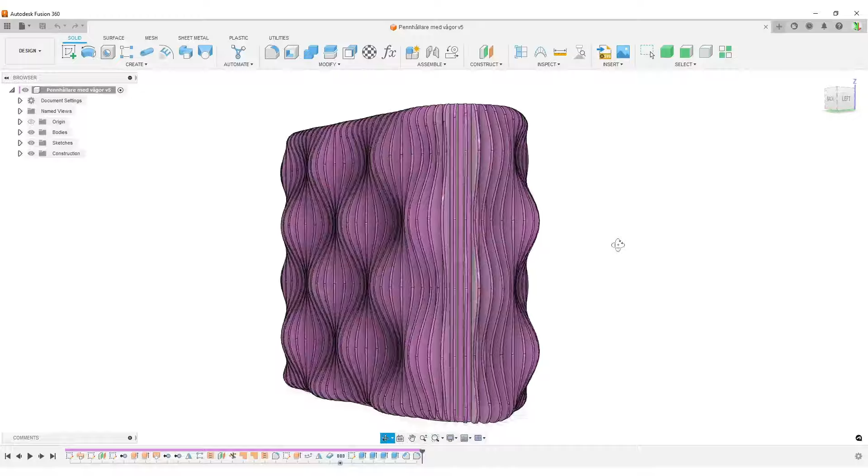I've been away for a while doing other stuff, but now I'm back to doing more strange design. In this case, like you can see, the waves going in and out of this. In this case, a pen holder. It can be done for other stuff.

Let's have a look. I have already uploaded some to Printables. This is basically the design we're going to make. I will not make this internal divider in this, which I've not designed, and there's a triangular version.

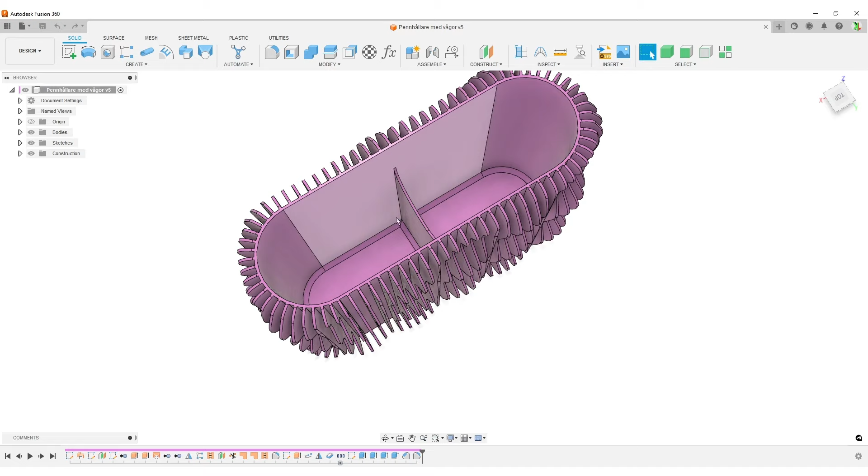Some more things to say. I will not make this. There's a chamfer and an internal support or divider here, which I will not make. I will make the outer body now. You need to add this yourself in any way you want to.

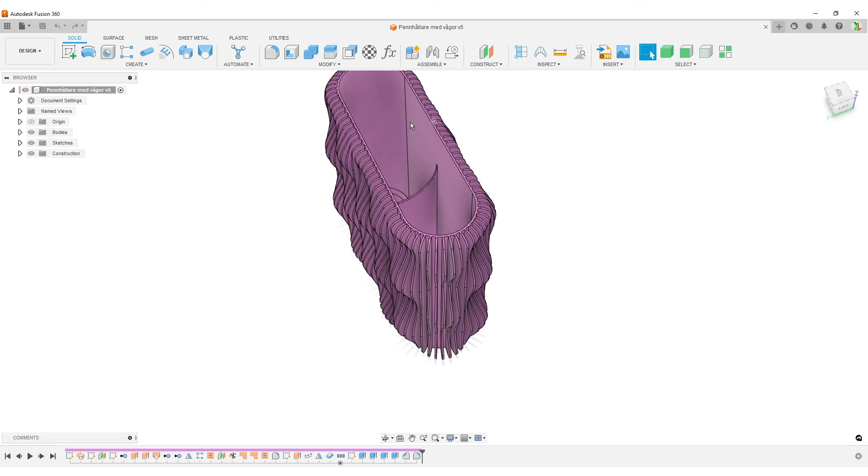I did this one for two reasons. If I put a pen down here, it will slide down and basically disappear. And the other thing, it makes the model more rigid. If I don't have this, these two outer sides here can be squished or stretched outwards because it is flexible, even though it's PLA. And yeah, that's it.

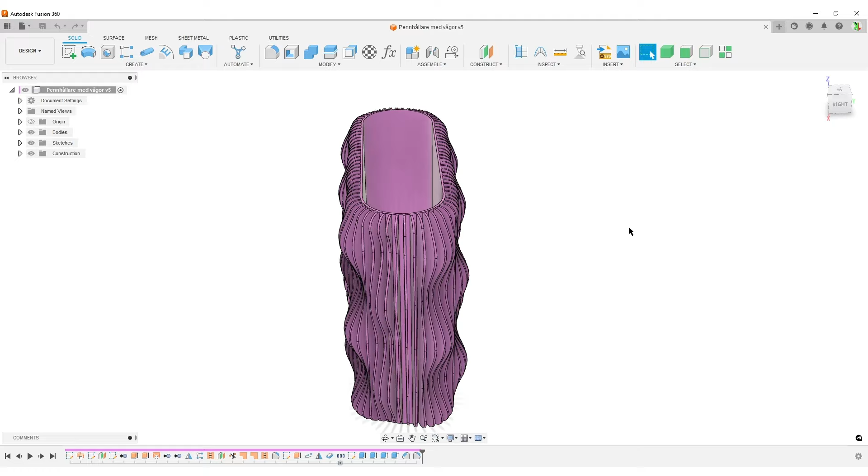Let's talk a bit more about this design intent. If you look at the model, you can see on the top here the slot shapes, and the waves are like conformed to the slot. So this is cut in a portion of the waves where they are basically at the same position. But at the bottom, I have like the maximum wave, to make this interesting geometry towards the table it's

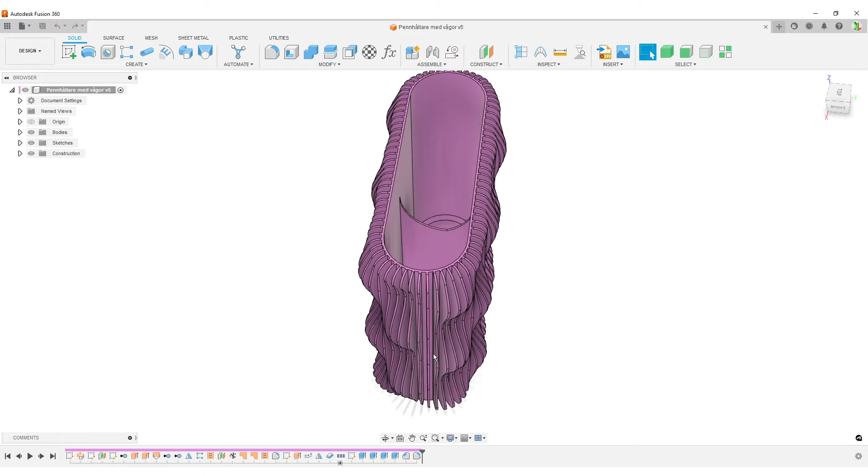standing on. Another thing, the waves, you can see that they are not like perfectly placed. They are slightly off. You can see the peak here is not exactly at the side here. If you want to do that, we can do that. We're going to work through the workflow and have a look at the sketches.

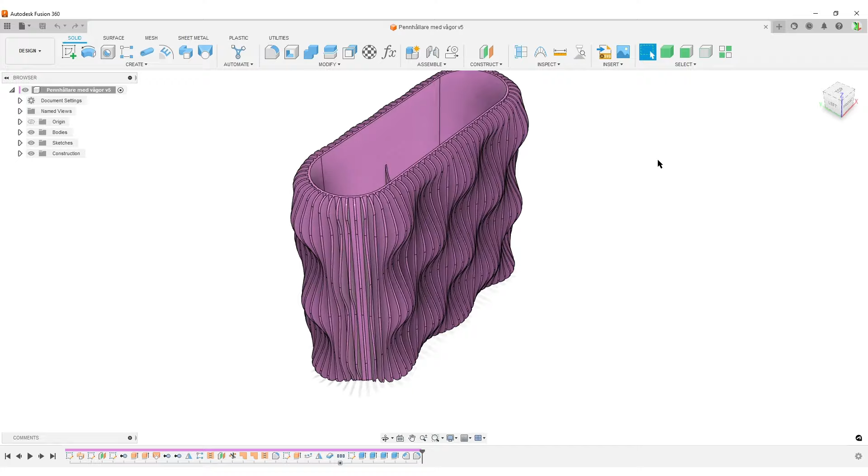And this is from a Reddit question, and in that case, there's a picture. And in that picture, there are waves on the round edges here on the ends of the slots. They are like revolved. There's waves, and then they revolve the way around and keep doing a wave. Yeah, that's a possible way to do it. If you want to do that, you need to do some more work on this workflow.

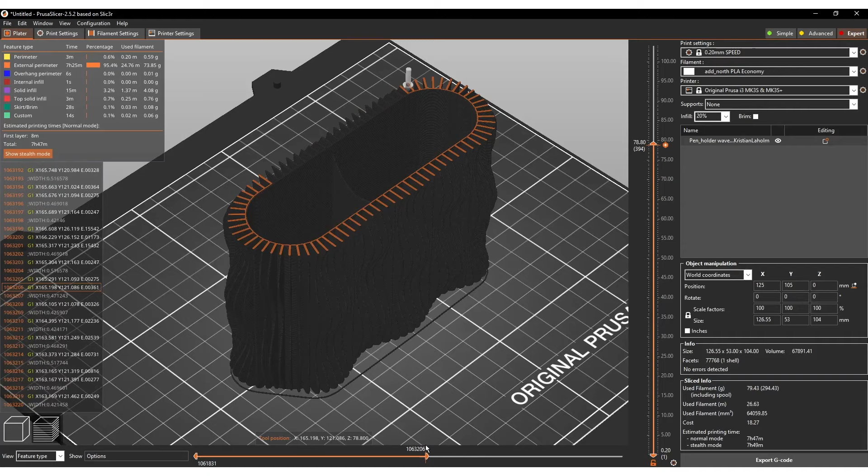If you have a bigger nozzle, it might be possible to print in vase mode, but I have a 0.4 millimeter, and 0.4 is too thin to be stable. So I'm running with 0.8. That gives enough stability and rigidity for my taste.

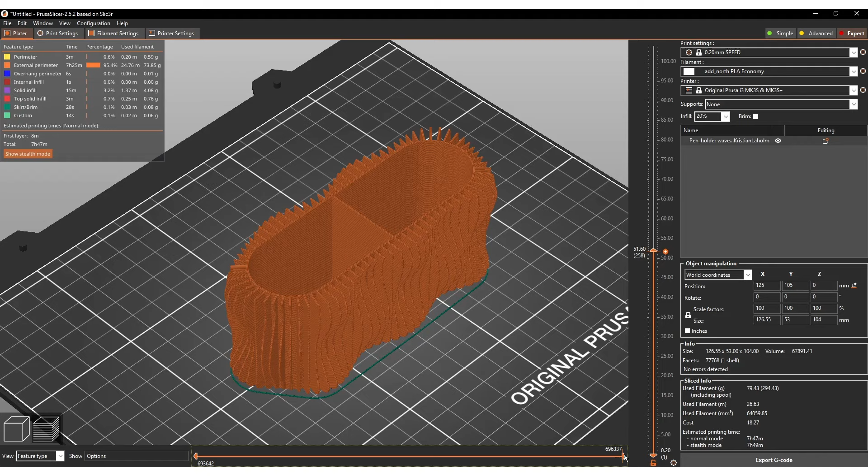So it does the outside first, and then it does the inside in this case. And of course, down to the support I made a bit further down, it needs to do two runs on the inside for the two sides, and then it does this. So still reasonably speedy printing because the nozzle doesn't run around chasing infills and stuff. Just does that. Let's move that out of the way.

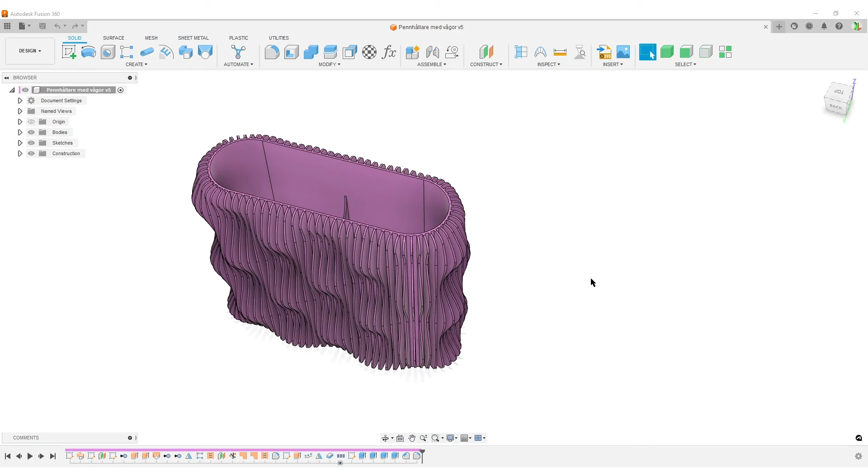For the rest of us who want to make the model, let's get going. We're going to start a new design. I was going to keep this here for reference if you want to have a look at it. We are here in a new design. I will not save it, but I normally recommend starting by saving your design.

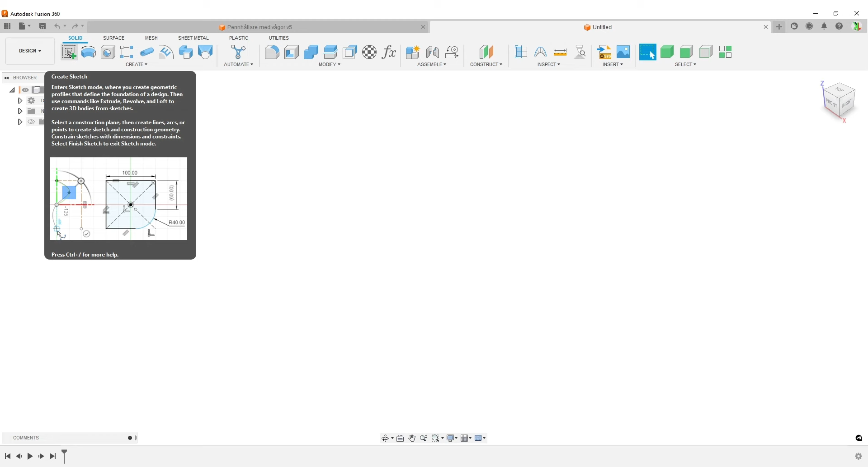Create a component if you want to compartmentalize things, or use this in other things, or derive it into something else. But I'm just going to make the design. This can be driven by parameter, but it's not really a parametric model. I will do some calculation as I work through the model. I hope you can follow along and understand how I think. But yeah, let's get going. Some of these things just need to be created.

Create a sketch. We're going to do it from the top, like that. Of course, we're going to start with a slot. Everything is basically a slot. I'm making the slot slightly off from origin point, so I can add constraints later. I'm going to do a midpoint for this construction line to the origin point, so things just lock down. D for dimension, let's start some dimensions. I want to do tangent because I want to select the outer edges of these two arcs.

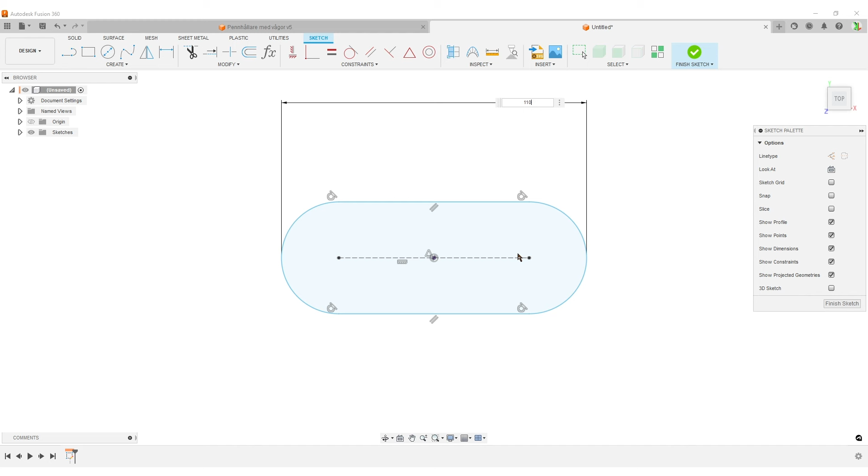110 maybe, this is going to be the path for a surface sweep. And the width of it, let's make it 38 millimeters, something like that. And we could do a line. This is going to be a profile for the sweep. Make it a bit slightly off from it. Make it vertical, it's going to end up being a perpendicular.

That's enough for me. I'm going to do a coincident constraint. In this case, I want to coincident the midpoint of this line to this line here, but not the midpoint. If you do midpoint, it's going to slam it to the center here, and that would make a totally symmetric model. I don't want that. So I'm going to do the coincident constraint, hold down shift, find the midpoint, and then select this line. That means I can take this line and move it in this direction, but the midpoint will stay where it is.

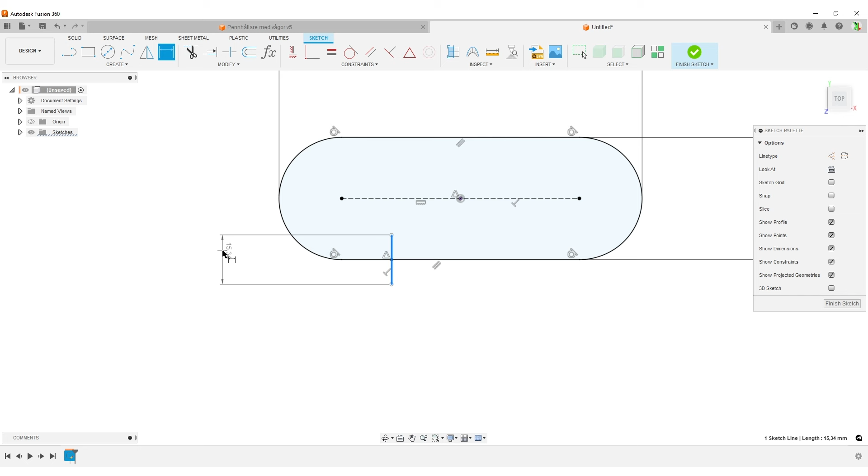D for dimension, this profile here. So this is going to be the distance between the peaks and valleys of a design, of a wave. So I'm going to do that 5 millimeters. This is a part where you can play around slightly. And then I will dimension this line here from the origin point. Let's just do 10 to start with. This I might play around with to decide how I want the waves distributed around the slots.

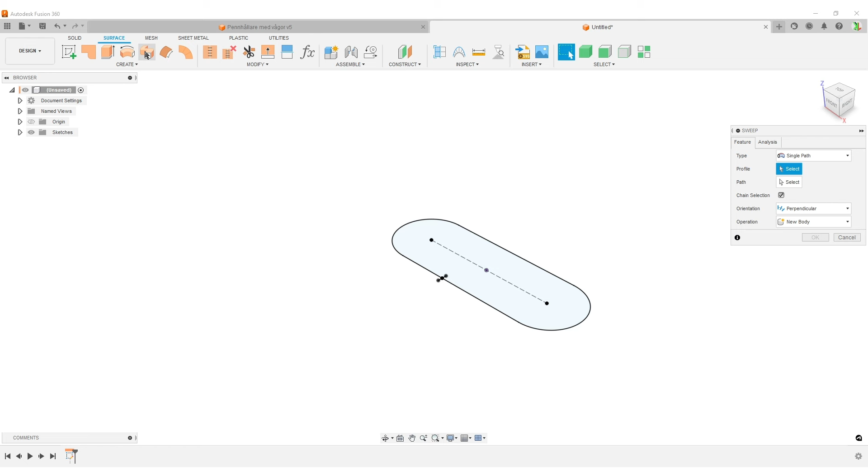So let's finish. We're going to move over to the surface tool and we're going to do a sweep. You can of course use the S key and search for commands. The profile is our short line and the path is the full slot around. And we're going to do some twisting, 360.

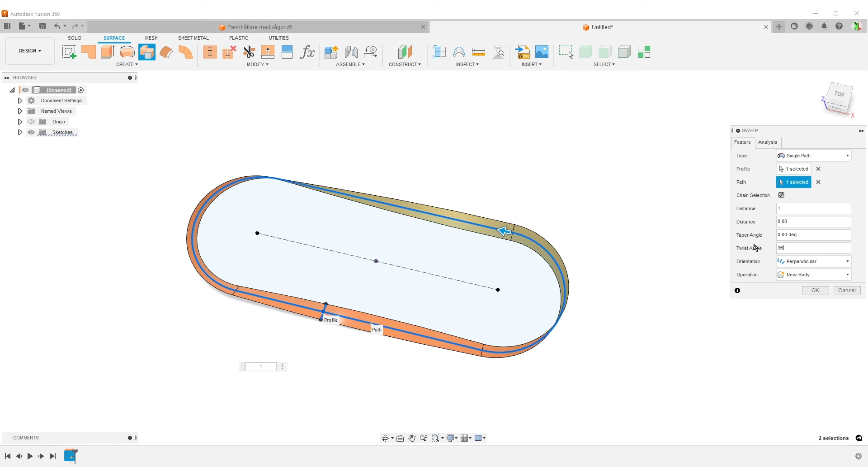Why are you moving around? Sorry, it should be a 1. Sometimes when I hit my number keyboard, it jumps around the menus. I don't know why, if my computer is doing some stupid stuff or something else, but distance should be 1, twist angle 360, multiply by the number of turns. Let's do 7 just to see if that looks nice.

Gonna hit OK, gonna look from the top and have a look at these, and you can see the problem here is I basically got one wave straight up on the side here. I don't want that, so I'm going to move that in a short while. But have a look, this is the amount of waves I want. Do I want more or less? So yeah, it's up to you.

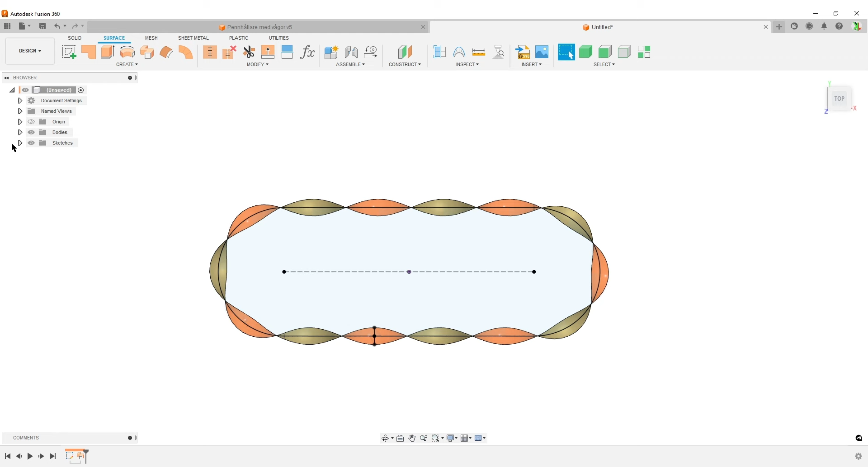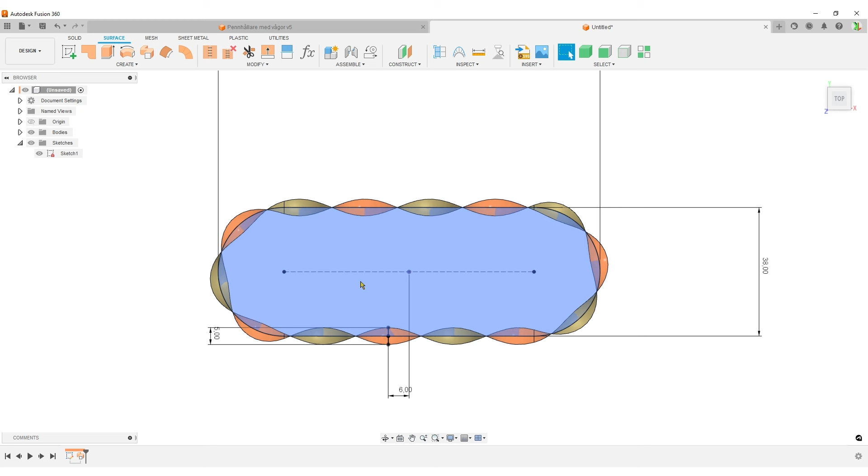Open up our sketches, right click, say show dimensions. So I don't like that this wave is basically on the mid of this arc here, so I'm going to edit this to like 7. Maybe move it to 6. That gives the feeling I like. You can see this wave, of course, there is a mirror symmetry because we are moving around. But you can see there's no wave directly on the mid of the side, and yeah, this is the way I want to do it. Up to you, play around the dimension.

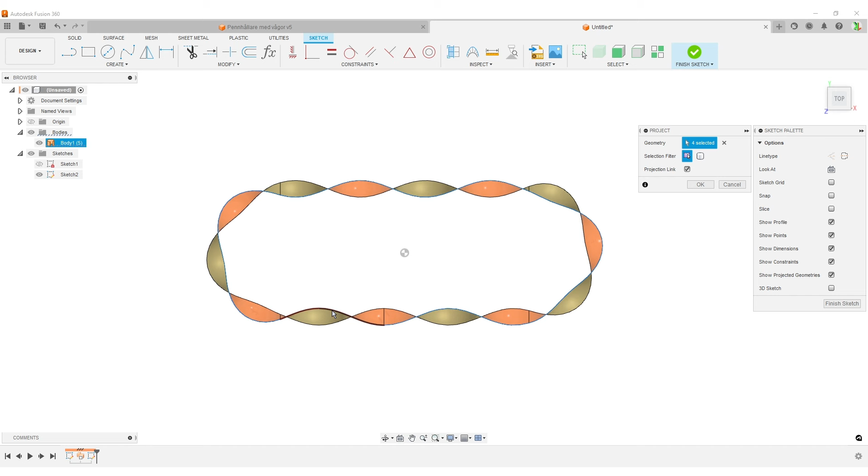Gonna hide that sketch, we're gonna create a new sketch. Once again, the same plane, hit P for project, and we can project in one of the edges of this. So we're going to make one of our first sine curves. This here, where are we? We are there, we are over here. If you get confused and have us select everything, open up the body of our browser and hide. Oh, we are missing one part, so we need that one for just checking things. Hide the body, we have a closed loop. Gonna hit OK, I'm going to finish sketch. That's number 1. Now I'm going to turn on the first sketch again.

You can name sketches, because I want to know the length of this slot shape here, also the perimeter. So I'm going to inspect, simply select the profile.

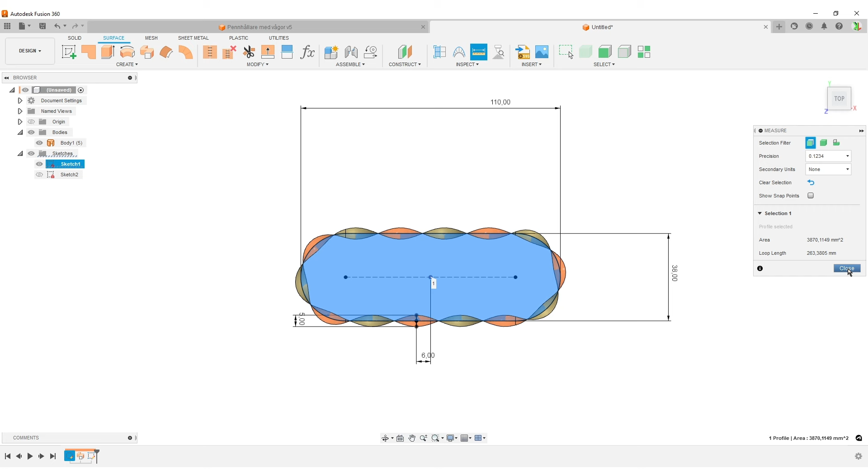I'm going to put the loop length, that is 263 millimeters. And we did 7 waves, so let's bring up our calculator. It was 263 divided by 7, and we get some strange 37.5. This is like one full wavelength. Why am I calculating this? Because I want the waves in both vertical and horizontal direction to feel almost the same. So I'm lazy, let's use 38.

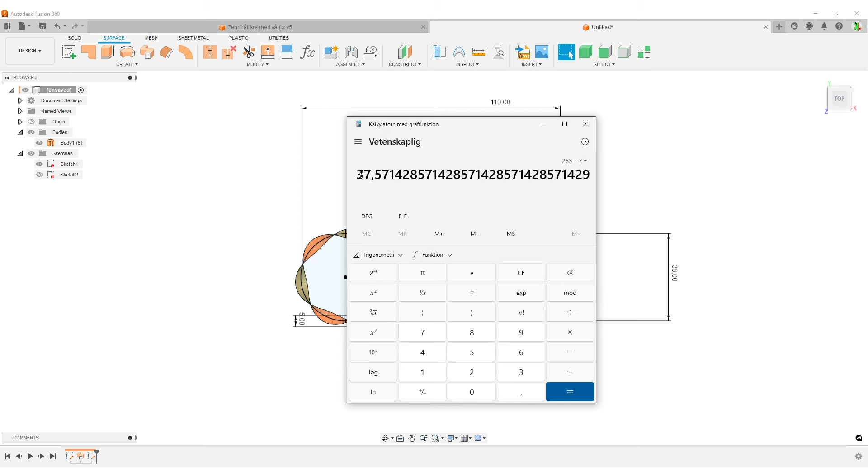Let's move this away, turn off this sketch. We need now to create - yes sir, we had our first wave here. Going to make a second one, so we can do that on an offset plane. As I said, I decided on 38, so 38 is a full wavelength, so I'm going to divide that by 2 because we're making the half wave.

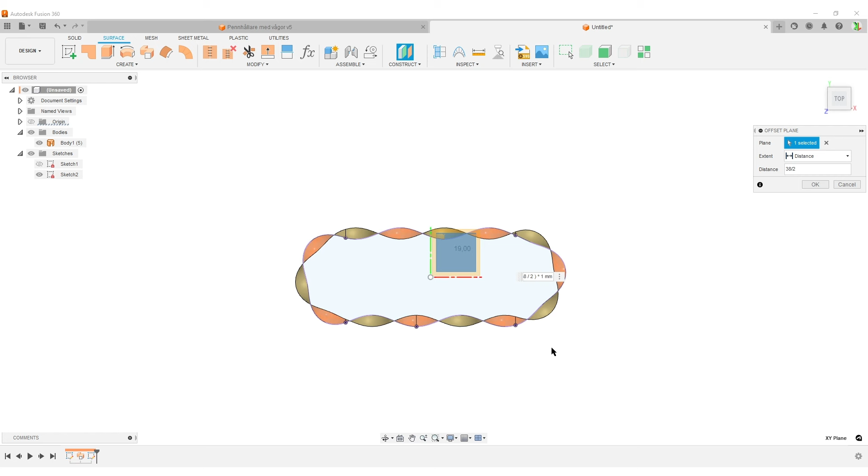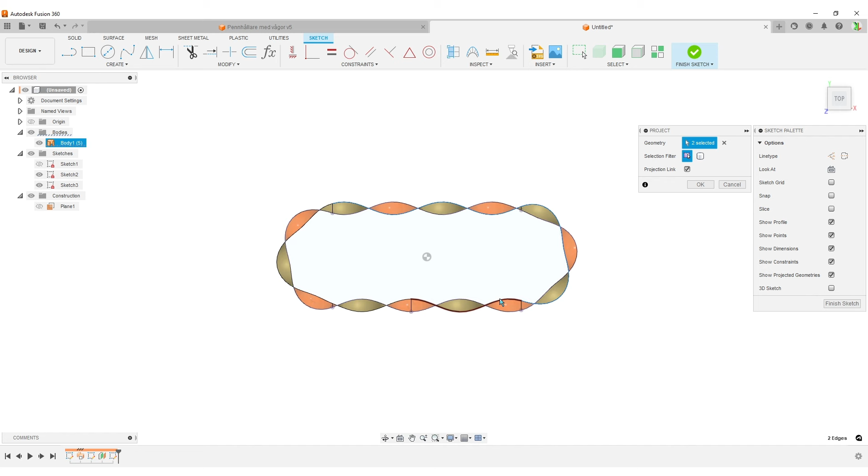Where do I want to go? You can see, okay, that's that size. I'm going to select the opposite here. That one, that one, let's see, and that, close the body to check. We have like two closed loops. Going to hit OK, finish sketch.

Turn things around slightly, have a look. Yeah, well, that's good, we have now used this body for what it's supposed to do. So just to clean up things, I'm going to right click and do a remove, because I will not use that body again, I don't want it in the way.

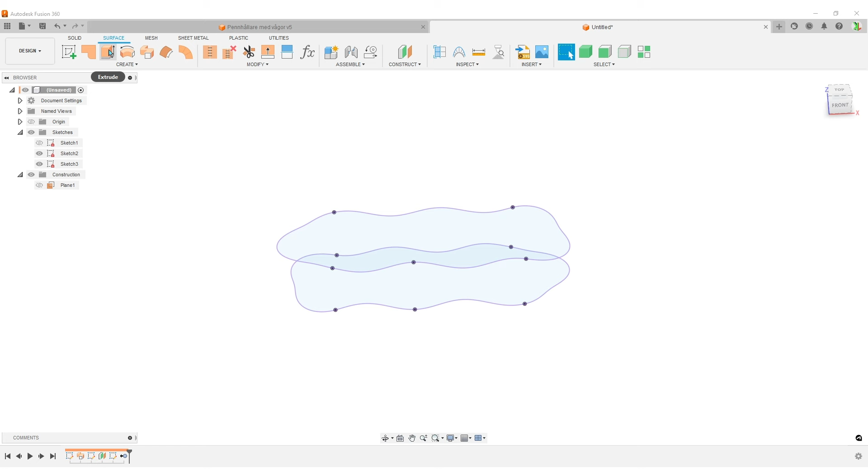Going to extrude, surface extrude, select the top here. This I'm going to do up 5 millimeters, extrude - this is supposed to go the other way. I'm doing this because I want to make a loft, and I want to make that tangent so it flows nicely together.

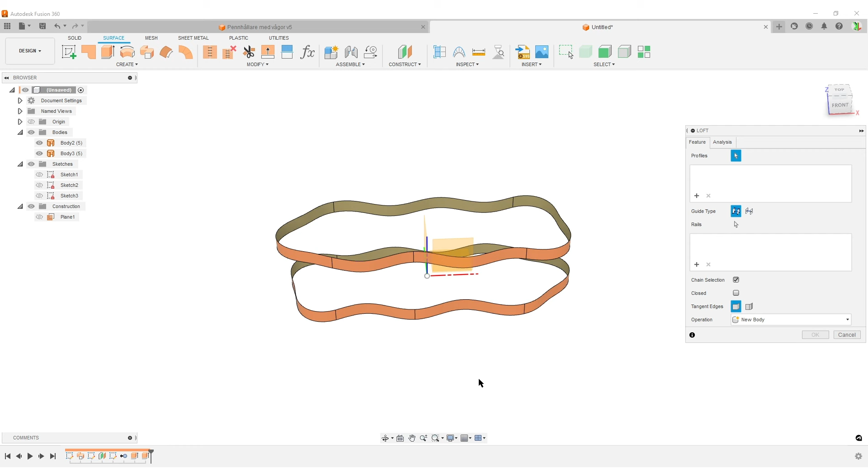Hide the sketches, so I know I'm selecting edges. Once again, here in the surface menu, I'm going to go for the loft. Make sure chain selection is selected - that means it will select the full loop directly, otherwise you have to click on the edges. Here and here, like that. And we're going to change these to tangent, and just simply hit OK.

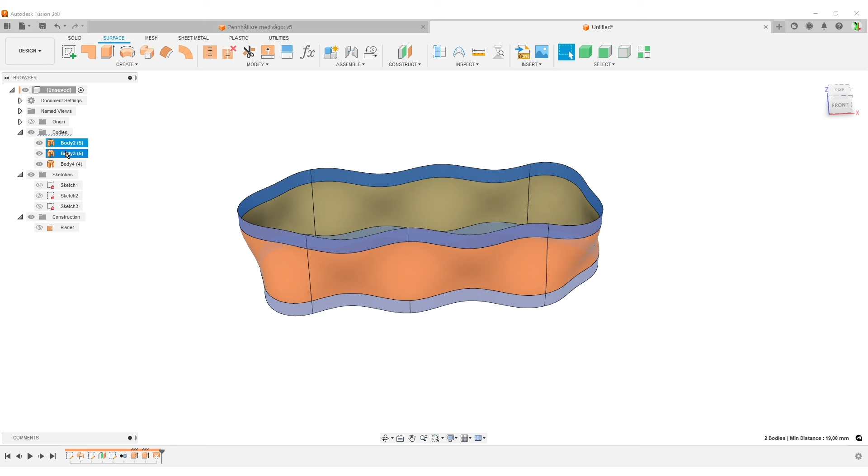We have now two tool bodies here, so I'm going to hold down Ctrl or Shift to select both of them, right click and do a remove. Turn on this plane just to see where we are.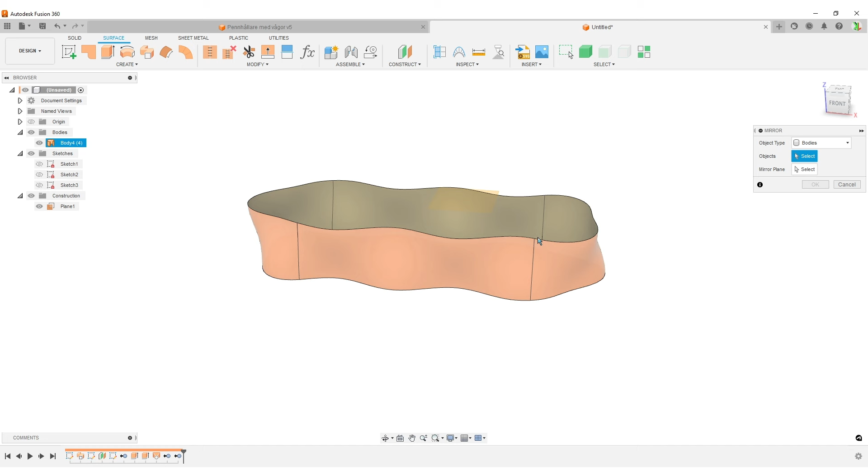Because this is like half of it - made half a wave, so going to do a mirror. You can find out by the modify, or simply hit S on the keyboard and start typing in mirror. I also have placed it up here, I could use that. Mirror of body, this body, what plane - our construction plane we made earlier, that's where we made the top sketch. Going to mirror, the operation is going to be join. Hit OK, going to hide the plane.

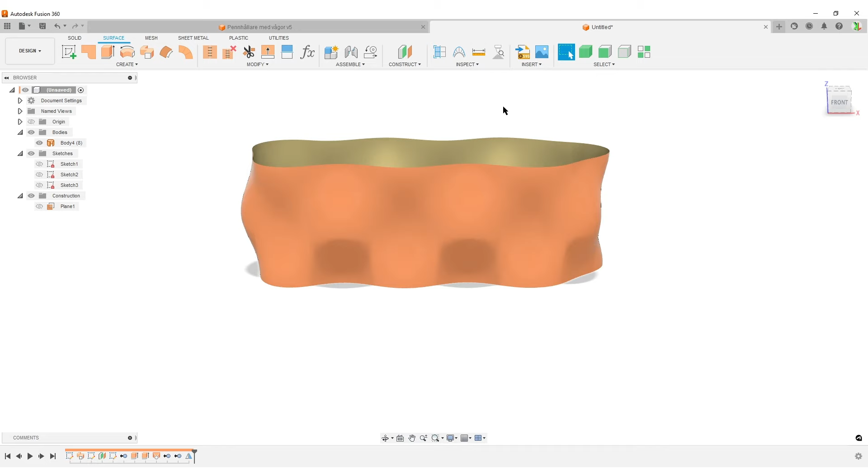And just for visibility, have a look at things. I could do Control 4 to hide the edges. Look, okay, we can of course do inspection of curvature and have a look. The curve is not really pretty, but we can see that things are not totally wonky. I'm pleased with that. I'm going to turn off edges, Control 6 to turn off the visibility of edges.

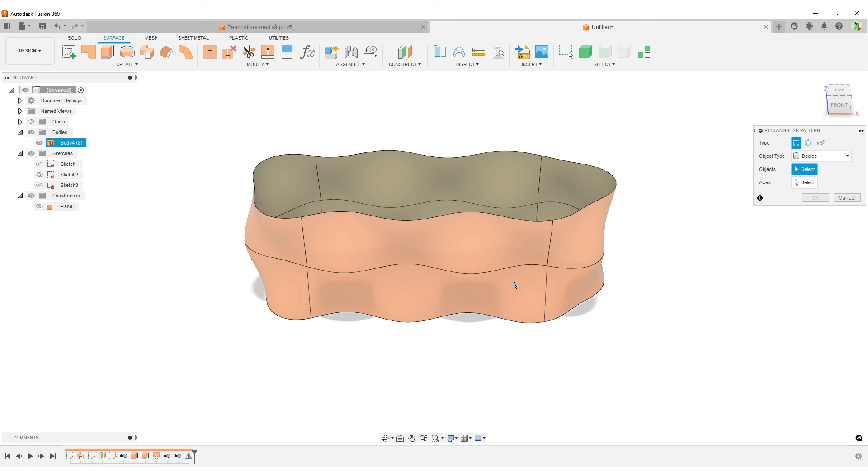So I've only done one, I need more of these. So I'm going to do S and find rectangular pattern of bodies. Once again, this body, and the axis is going to be the blue one up here. Spacing, yes we want the distribution to be spacing, and we use the number we calculated earlier, that's 38 millimeters. It's going to make 3 of them.

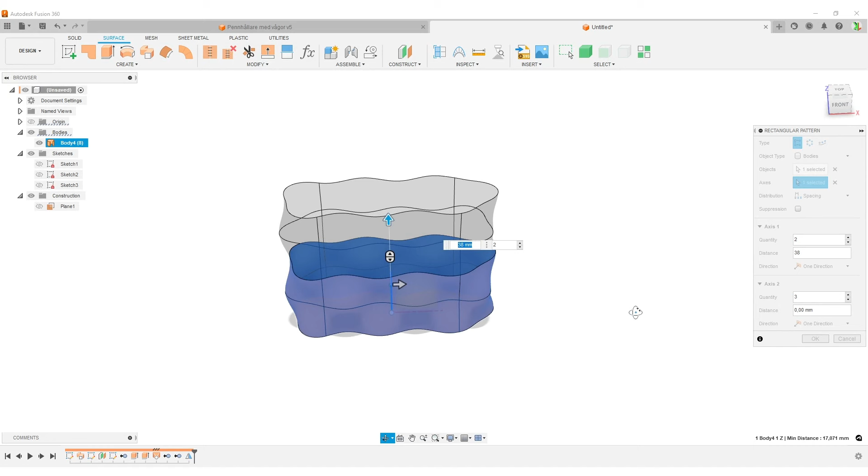I really only need 2, I think, this time. And I'm going to make it a bit lower - it's up to you, play around with the dimension. So all I'm doing now is trying to make things look nice like this. So now I have like 2 waves. This is going to be the feeling of ribs when I'm done.

But the problem is now, you can see this, I have like a wave up here, but if you know your wave curvature, if I slice this halfway up, there's like a slot shape here. So I will make an offset plane from here.

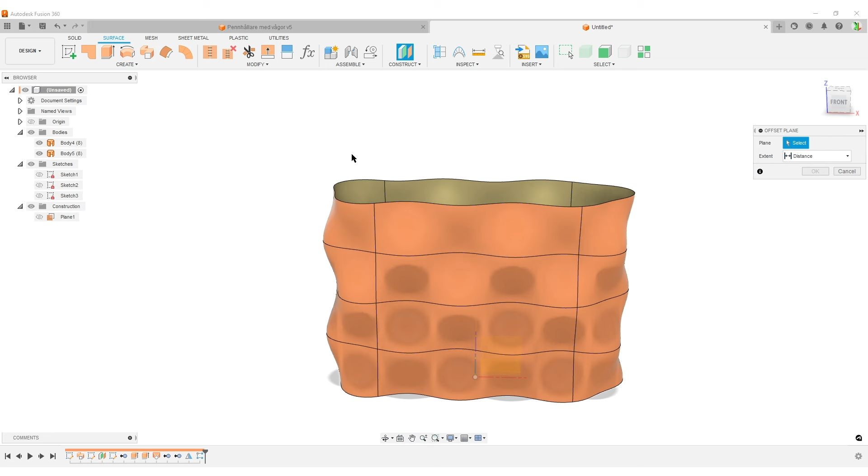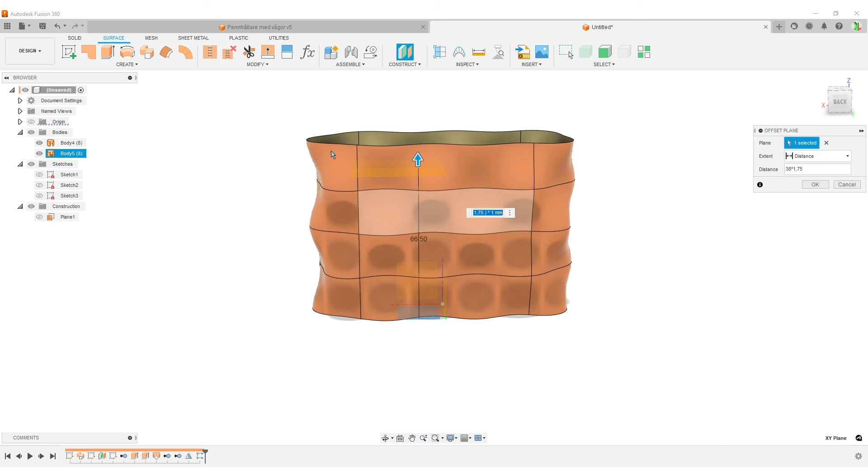And how far is that? That, of course, is going to be distance. And we know each wave is 38 millimeters, times 1.75. That should place the plane. Let's have a look. Yes, it places the plane in the middle of this wave section here. It's going to hit OK.

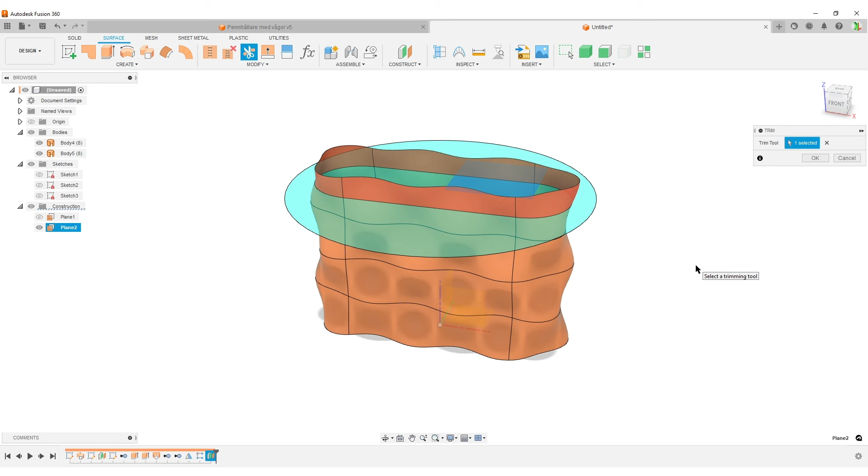Going to do a trim. Use our plane to trim, cut off the top. You can make a trim tool, that one, and I want to cut off up here, like that. Oh, now it's correct. You can do this as a sketch line, other ways, but if you're changing too much of this, you need to by hand go back and change things. This can't be totally automated in Fusion. Hit OK. And if we have a look now, you can see the top here is no longer like a wave, we have a nice slot shape.

I will destroy that in a short while with a fillet, but we are close to having a slot up here in the end design. And at the bottom, we have this nice wavy path towards the table.

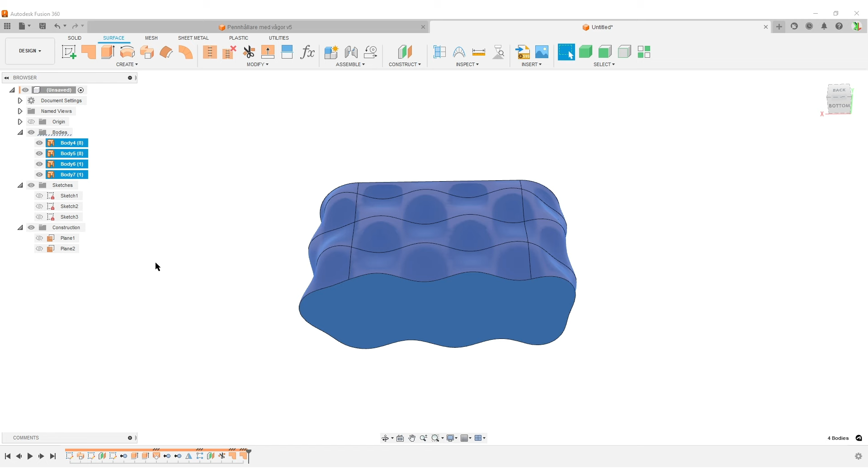Good, we're going to do some patches. We're going to close up the top, make a patch for the bottom. We could use a boundary fill or something else, I'm going to make it like this. Fusion does some thinking. Select all the bodies, I do in the browser, you can select in a window the way you want. We're going to stitch everything together. Hit OK. And we have this part, the shadows become a bit strange with these soft curves, but yeah, we have our body.

Now I want to soften the edges. So do F for fillet, select top face, select bottom face, 3 millimeters maybe.

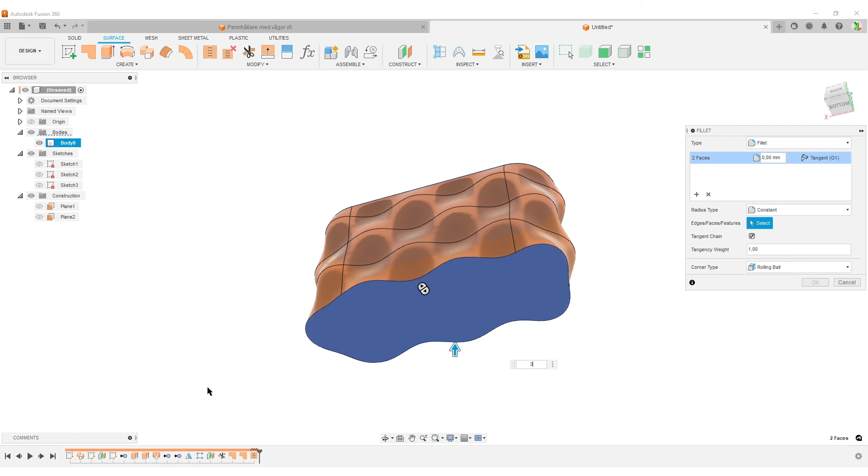This will make it slightly hard to print at the bottom here and up here, and you can see it slightly destroys the slot shape because it's pulling the fillet down a bit on the side, but it's good enough for me. You can tinker by moving this last plane up and down to get this back to a really nice slot shape up here, but I'm going to end it like this.

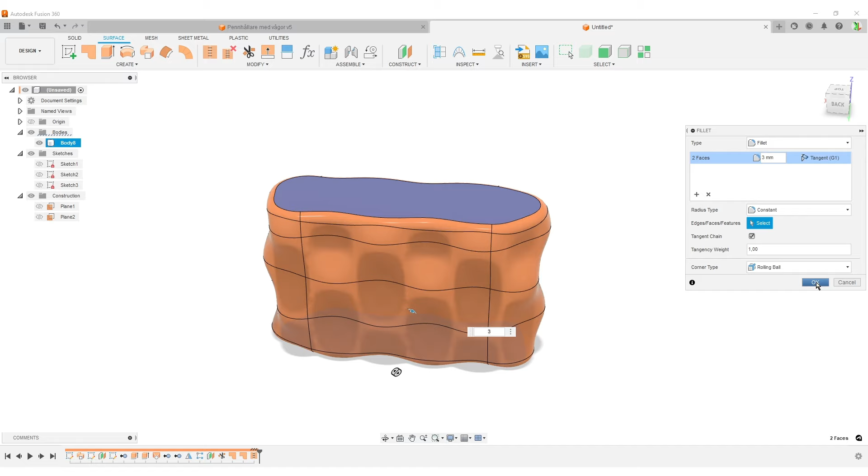Hit OK. Wait for Fusion to do some thinking. So now we have our basic body.

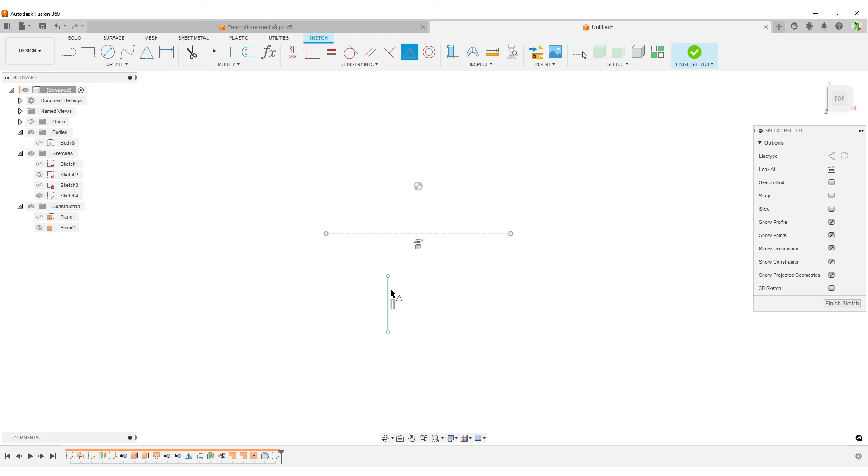I'm going to hide this for now, turn on our first sketch. Create a new sketch, select my plane, and I will hit P for project, and only project this line. Going to hide the first sketch for now, turn that into construction geometry. Make one more line, in this case going midpoint to midpoint because I want these ribs to start here. Now turn on my first sketch.

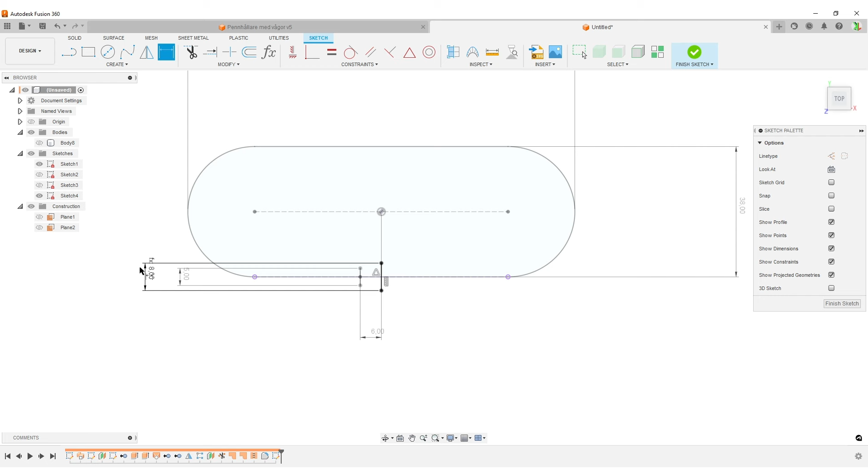I want to dimension this line, it should be slightly larger than this, so hit D for dimension here. And then I can simply, by making the previous sketch visible with dimensions visible, click on this dimension and add like 3 millimeters. So it's the same, it's this plus some more, because it needs to be overextended slightly.

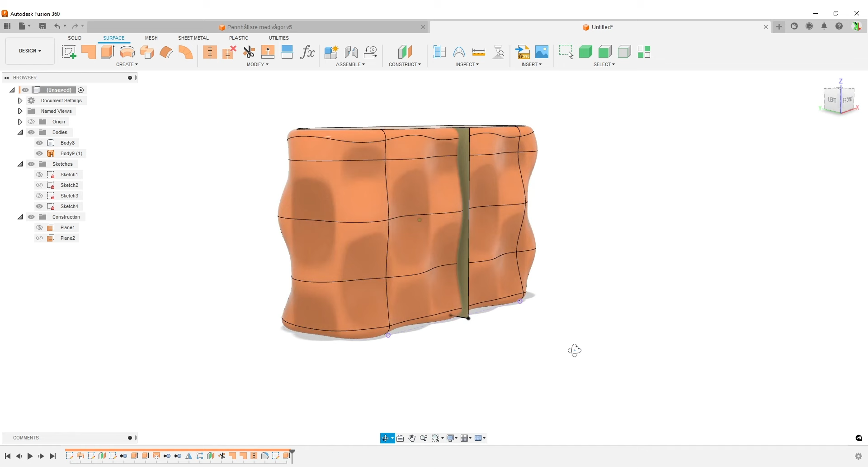Gonna finish, gonna hide the sketch for a short while here. I'm gonna extrude, turn on our body. We're gonna use that as a tool for the length, the distance, to object. Simply select top face, hit OK, and our surface is going all the way up. Thank you. Hide the solid body, we're going to use that later.

Turn on our first sketch with the slot because we're going to do a pattern on path. S again, pattern on path for bodies. Yes, this body along this path.

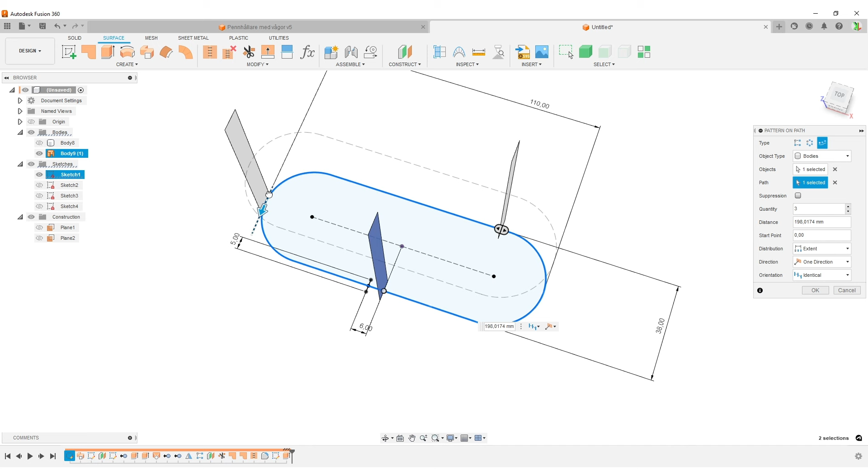Now there's a small problem with this. I know if you move this all the way around and try to make it closed here, it basically disappears. So what I like to do is move this around. There's a snap point halfway, you see it wants to stop and snap there. So I'm going to stop there, and I'm going to change the orientation to path direction.

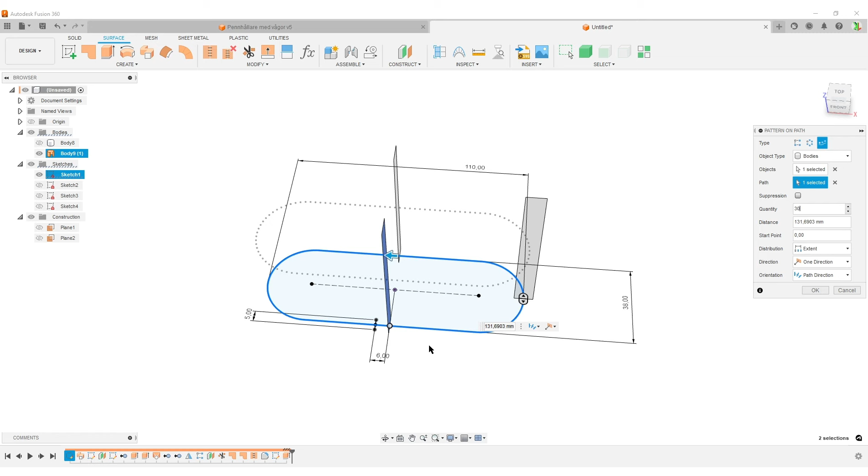Like that, looks nice. And quantity, I want more than that, I want like 30, I want 37 maybe. So let's decide on 37 and have a look.

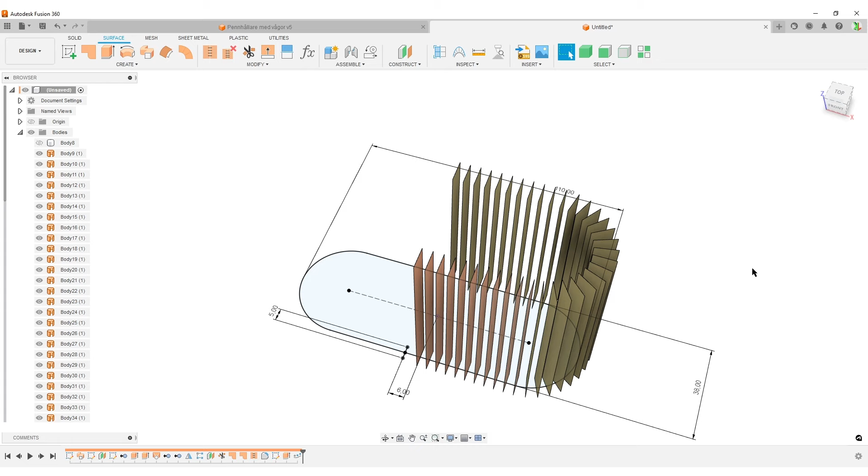Create this body, I can do an inspection between this here and this here, so I have 3.6 millimeters between them. So here I can do some checking on how I want the design to be. The more surface bodies you make, the harder the calculation for Fusion will be, of course, it takes longer time, but yeah, play around. It depends on how much memory and how good your computer is, and I have a computer with too little memory. I'm a bit low on memory.

Anyway, we made half of the bodies, but these are in the middle. We're going to look for the top, we're going to use the mirror command. S.

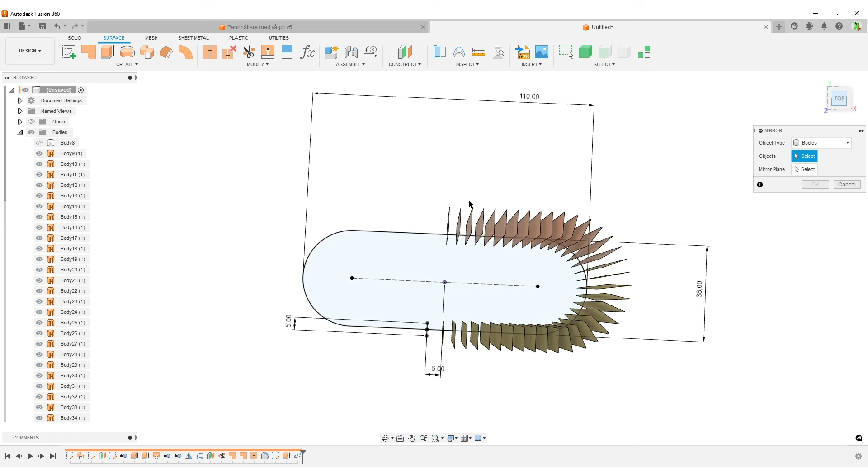We're going to mirror bodies. So I'm going to do selection, but I don't want these 2 bodies here. I don't want these 2 here. Look to the top. So I'm going to do my window something like this and all the way over to here. So I'm selecting all the bodies here, but not these 2. And I'm going to mirror, because then I would duplicate those bodies and that's unnecessary. And select here. Hit OK.

Now I made a massive amount of bodies. I can select them in my browser, but I'd need to do some massive scrolling. So I want to make a selection set of these bodies. So I'm going to switch my selection priority here. You can do that in the menu down here. I'm moving up here because it makes it easier to turn it on and off, because when I click here, you can see you get the check mark and then you can turn it off. You get body, faces and edges. So I'm going to do select bodies, or priority bodies.

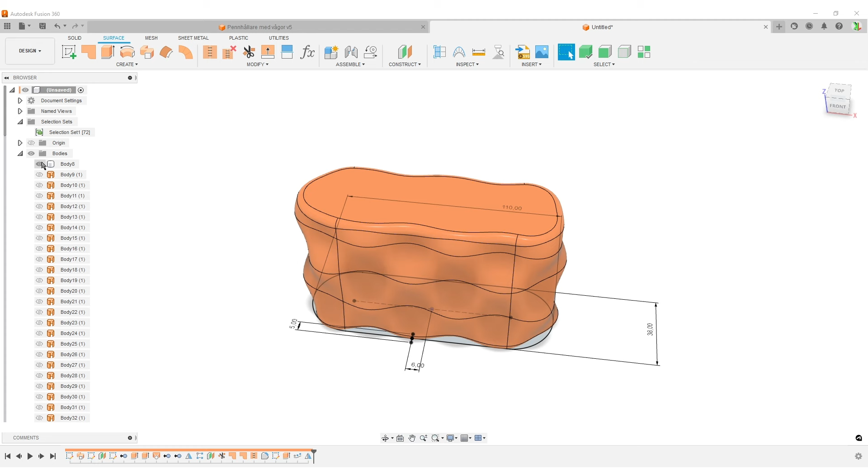Select all the bodies. You can see body selected, not the sketches or anything else. Do right click and do create selection sets. And I got the selection sets up here. Which means I can now simply click on this here and hit V on the keyboard to turn on and off the visibility. Oh, I want to see my surface bodies again. Do the selection set, push V, and it's back to visible. Selecting all these bodies, about 70, 80 bodies, takes a really long time. Anyway, we have done that much.

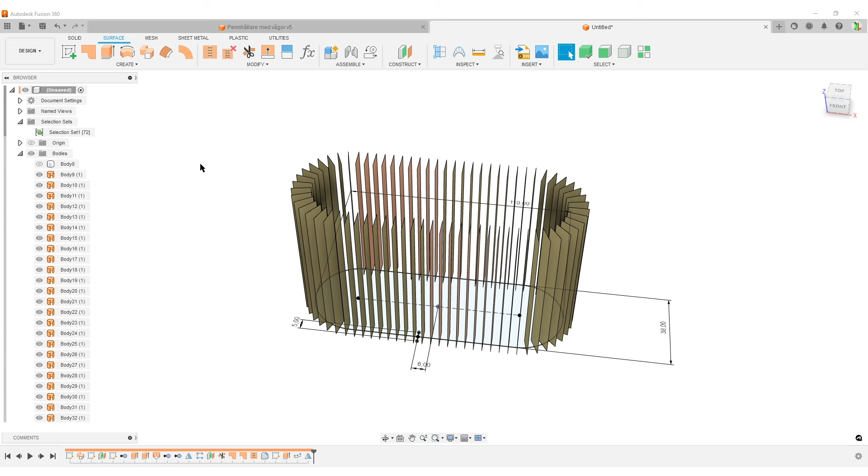We're now going to add some thickness to these bodies. So you do S and do thicken. I'm going to turn on the visibility for my solid body here. So what faces do I want to select? I want to select my bodies here. So I can simply do the selection set here. Click on this. Fusion selects all of those. I have already previously made this model just to try out things so everything works.

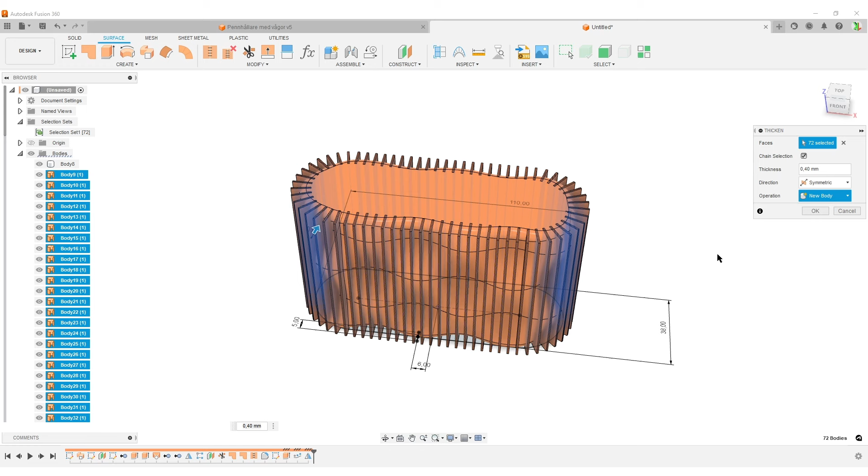So we are back to thickness of 0.4. Remember, Fusion is adding that on both sides when you do the symmetric. That's what I'm doing here. So we do symmetry 0.4. We're going to end up with 0.8 millimeter bodies. And not new bodies, we're going to do an intersection. I made this first solid body visible, and we're going to do an intersection. And now Fusion does some thinking. Wait for it to think. Like that. Gonna hit OK.

Oh, I love when Fusion does calculations. Hope it doesn't fail. Yeah, it's not responding, so it's thinking.

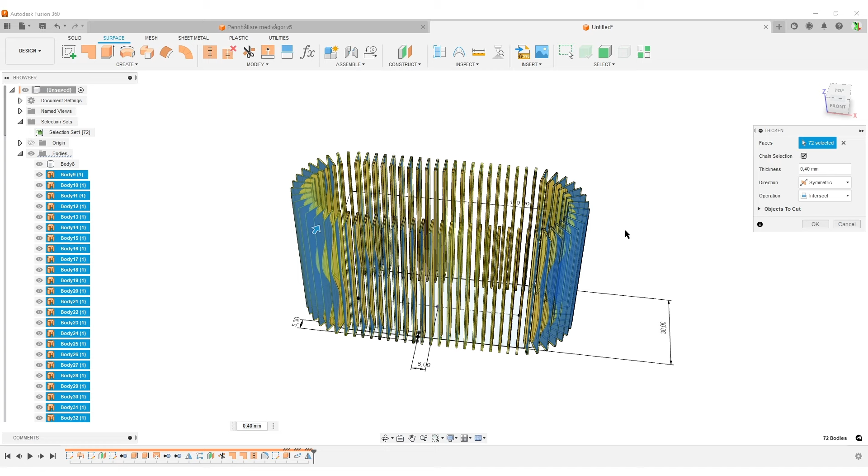There it is. So I still have select body priority activated. You can see the check mark. So I need to remember I can't click on sketch things and stuff like that. I really don't know if I need it, but I made a lot of bodies here, so why not make a second selection set of these? Right click to create selection sets, like that.

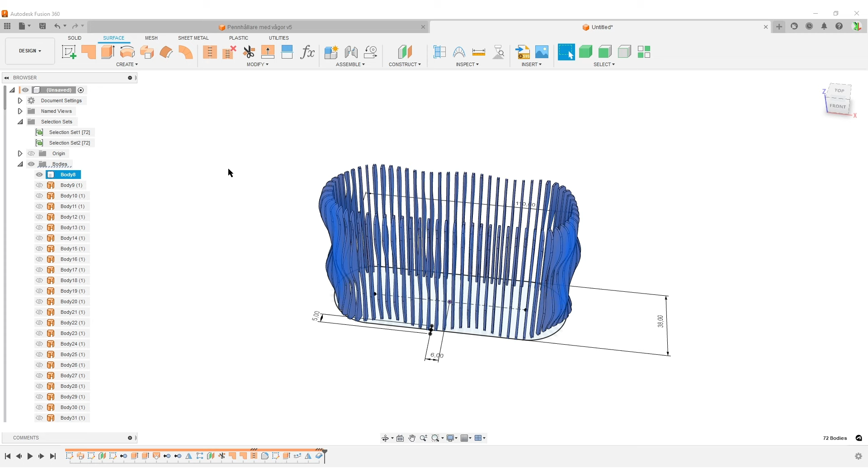Now I will turn off this body priority. Otherwise, you can see, if this is activated, I can't touch the sketch. You can see I can click as much as I want for dimension. It will not pick up that. I need to turn it off. Now I can edit the dimension and highlight it. Anyway, so I'm going to take all of this and hit V to turn off the visibility. And I can for fun just do this and hit V to turn them on. That's not the important thing I want to do.

I'm going to select all of these. I don't need these surface only bodies anymore. So I'm going to right click and do remove. And have a look at the timeline. Our timeline just exploded and filled up with remove bodies. So I'm going to click on the last one. I'm going to move back the timeline and hold down shift, click the first one. So I'm going to make a group selection, right click and do create group.

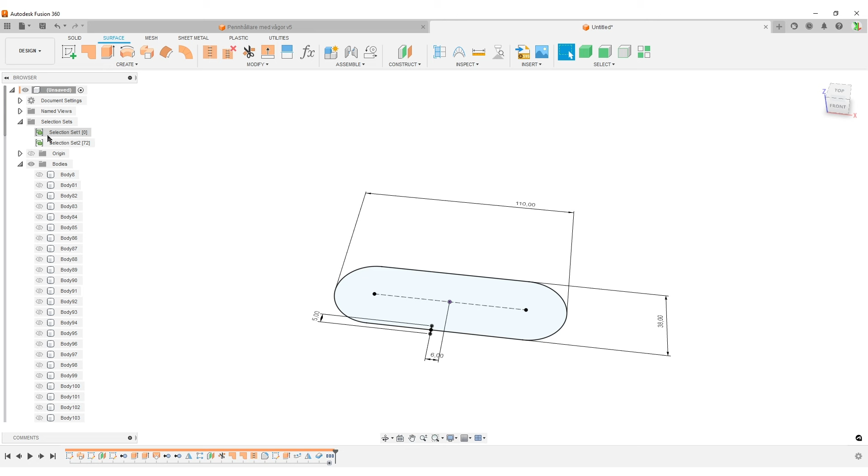You can see my timeline is back to reasonable length. Otherwise, it gets too messy. I can expand this again. You can see it gets way out of hand. So by doing that, we are back to that. You can see the selection sets went back to 0, but we can now select our second one here, turn on V for visibility. So we can look again. Going to close down the body now and go back to our sketches.

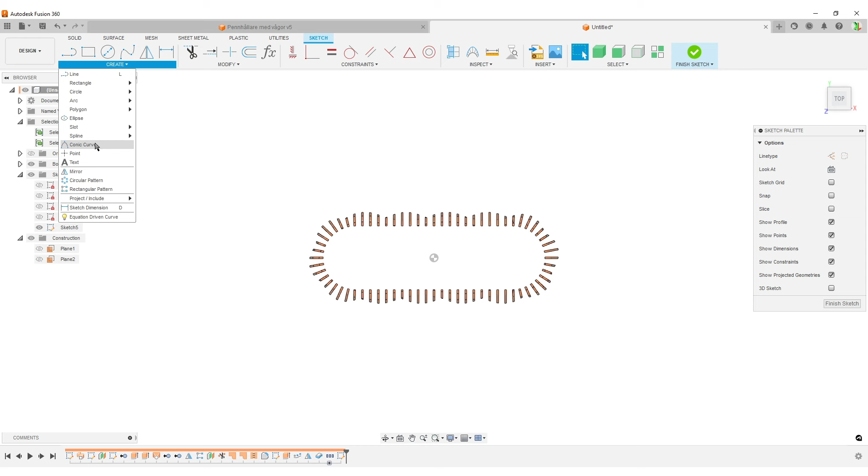Going to hide that. We're now going to create a new sketch. Create new sketch. This is for creating the inner solid body. So once again, we're going to do a slot, or we may call it the connecting body that connects together everything. Midpoint between the construction line and here. And we're going to move in. And now we project in some. You can see some of these are not flat. We move over. But here I have flat corners. I will project in this point here.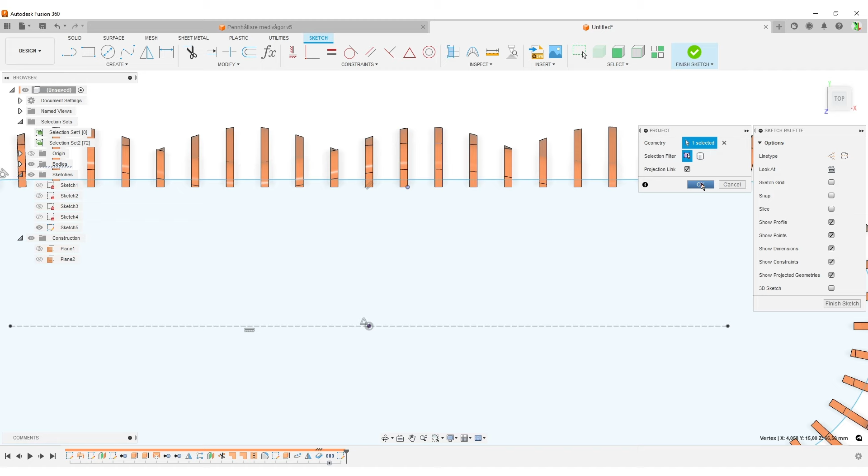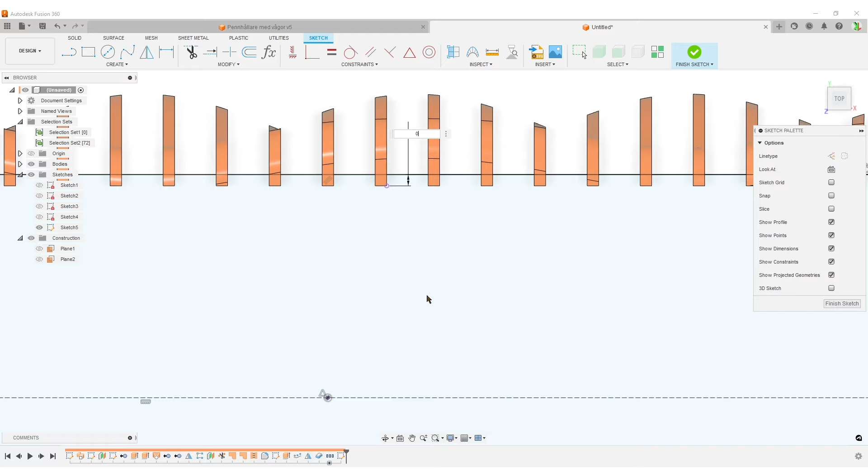Do a dimension. Once again, I'm going to end up with 0.8 millimeter thick bodies. And I have a desire to have this edge here in the center of this body when I'm going to do the things later. It cleans up and works better. I want to avoid tangent faces. So this is like a thing I like to do. It doesn't need to be done all the time, but Fusion hates tangent or near tangent faces when you do combines and joins. I'm going to make this 0.4. I'm going to use thin extrude later. So we're going to see what's going on here.

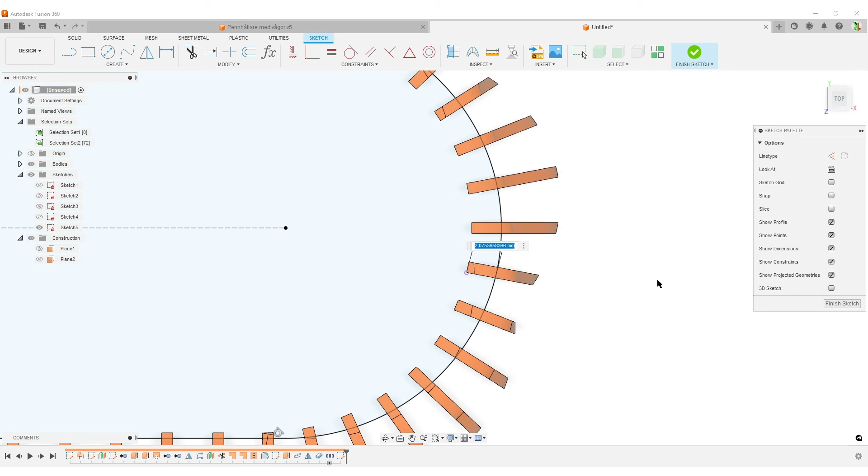I'm going to do P for project once again. Pick a point here. Do D for dimension, right click and say tangent because I want to select the edge of this arc here and here. And it's going to be aligned once again, 0.4. So we have made this. I'm going to finish sketch. First thing I'm going to do now, we have these massive amounts of bodies. I didn't really need the selection set when I think about it now, but it's good to do.

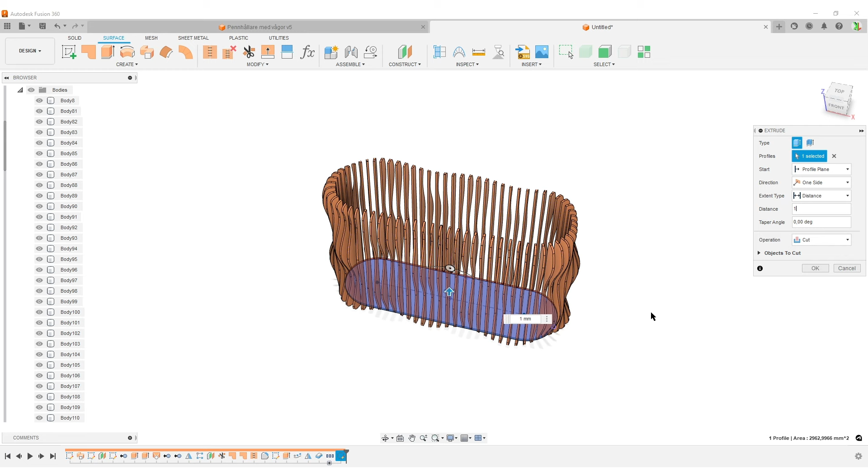Going to extrude. I'm going to extrude this. This is going to be my bottom thickness. I might make this 1 millimeter to make it a bit more stable. And Fusion, of course, always starts with a cut. No. I want to do a join. If I do this join now, I will end up with one single body. Makes it a bit easier to work. So we have join in the bottom.

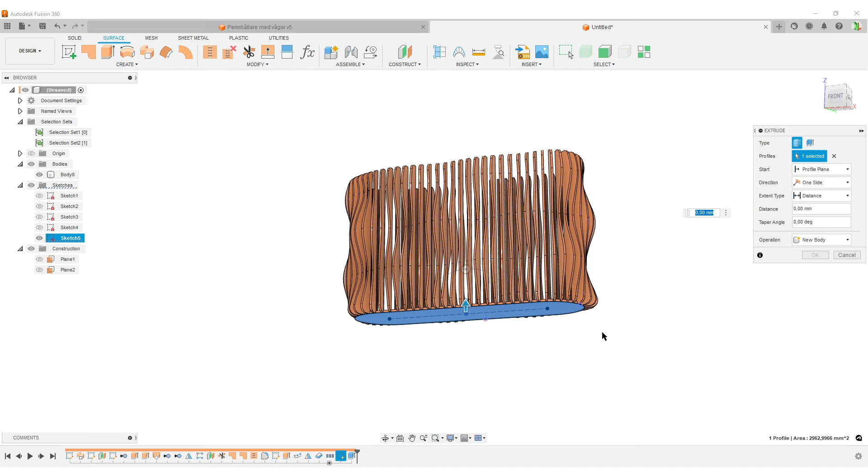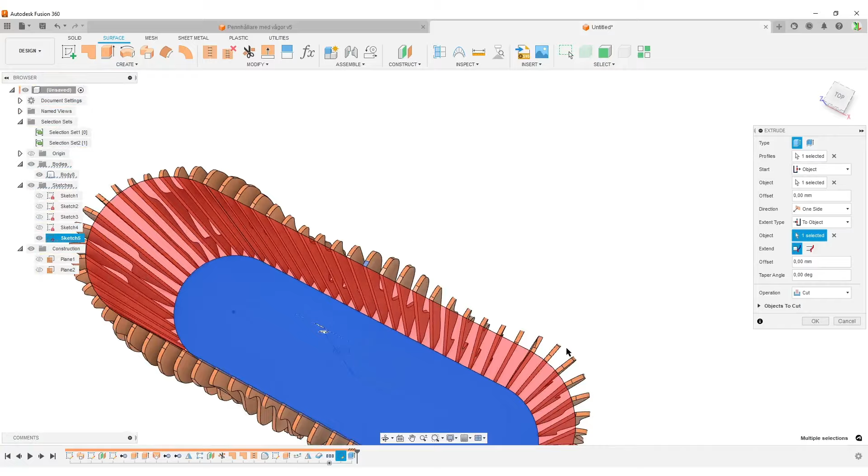I'm going to do extrude. This is just a precaution for myself. Select the same sketch. I'm going to do this from object now. Select the top face here. This is sometimes not necessary. I like this to avoid errors. Distance to object. Select one of the top flat faces up here. You can see it cuts off and cleans up all of these. So these are going to be in the center in a short while. Cut, yes.

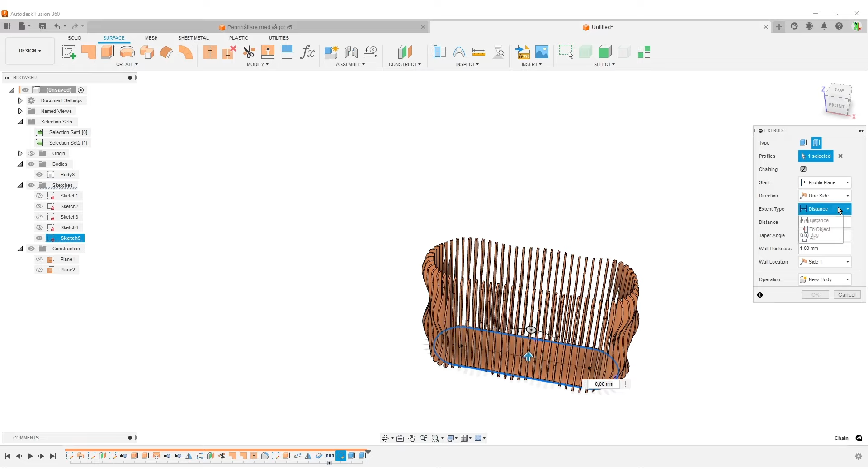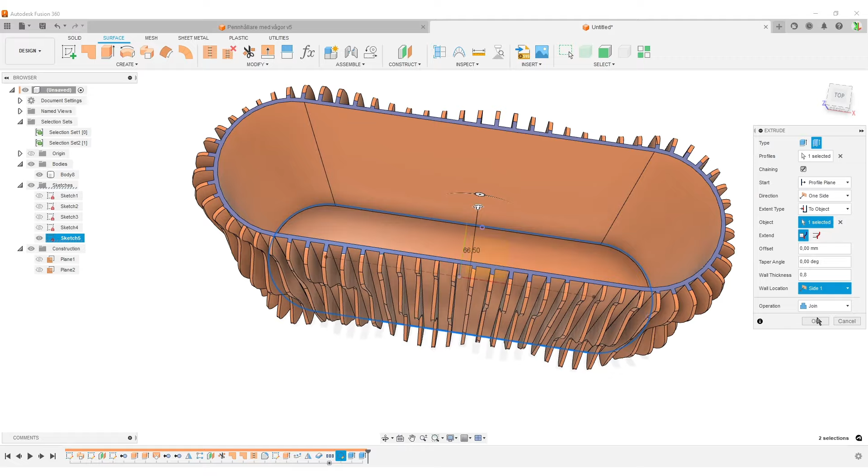We still need to create the wall. So we're going to do one more extrude, but now we're going to do thin extrude. I like to personally select this line here. Once again, the distance is going to be to object. Select the top up here, any face up here. Fusion, of course, is a bit stupid. Once again, wants to do cuts. And no. I want to do a join. I want this wall to be 0.8. And I want it to be centered on the line. That creates what I want to do. This is a bit you can play around with, but here it's still 0.8 everything.

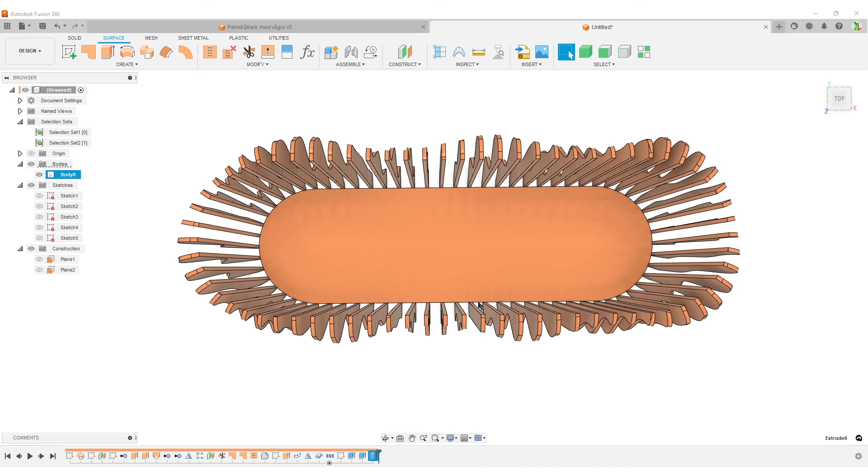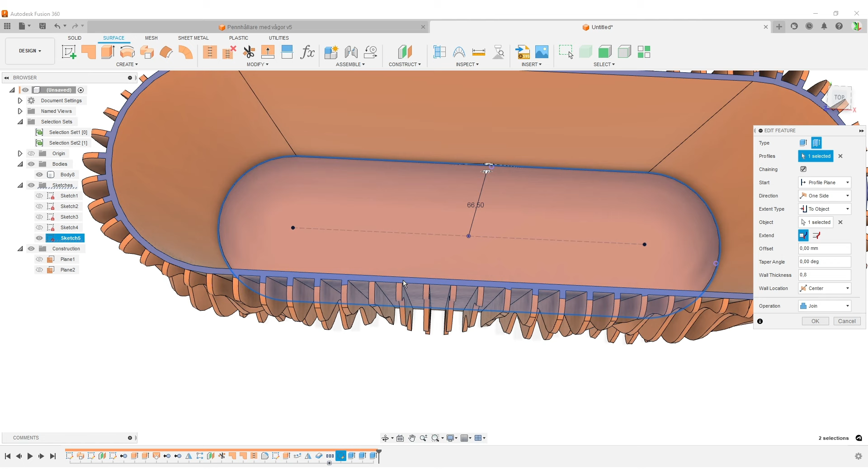There are a bit different ways of doing the last steps here. Let's show one way of doing it. But the important thing is, when I go back here, if you look at this, can I hide this somewhere? 0.2. It's more visible if you make it combined. But as you can see, I can basically change by doing this center here and have a cut earlier. So the cuts of our ribs are centered on this thing here, which means I can change things without this body poking out or being too short and not being included. So that's my way of thinking. Sorry for me rambling around.

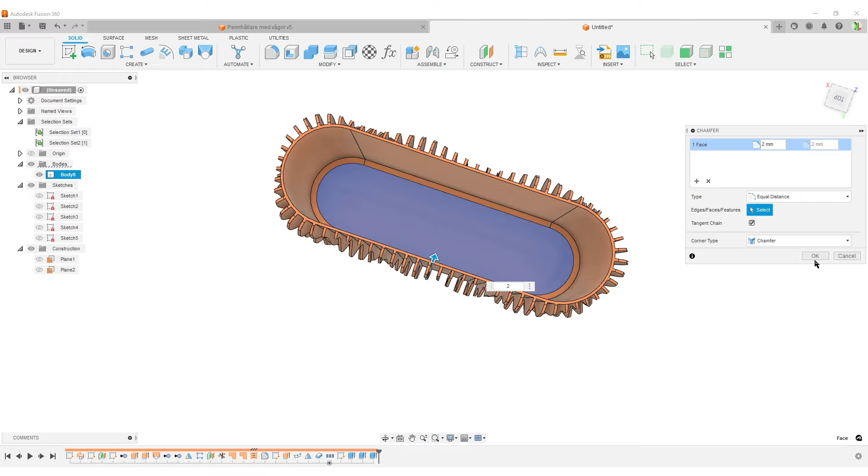So by doing that, we have made this part here. And now, of course, we can add some solid. At least I like to add a chamfer down here, like a 2mm chamfer, so it gets a bit more stable at the bottom, and you might add some dividers or do some other stuff, whatever you want. But this is the basics of how I create these wavy ribs. And of course, you can make more ribs. The more you make, the more calculation Fusion needs. So don't hesitate to make a cup of coffee or a drink, because I'm a bit thirsty, to have the time to let Fusion do its thing.

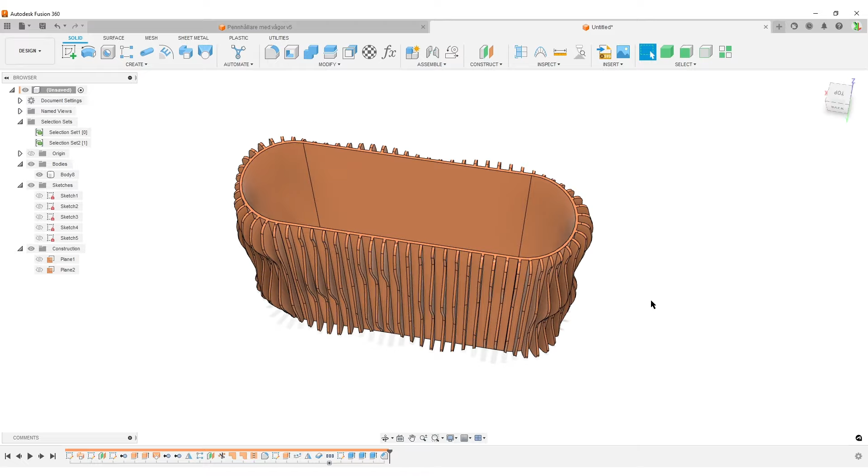So with that said, I hope you found something useful in this that you can use for your own designs.